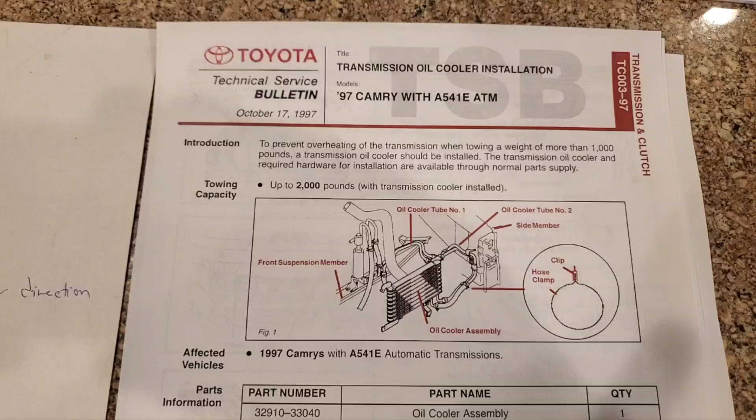In today's video, I'm going to be doing what I guess I would consider the first real mechanical addition to the car. Again, this car is the 99 Lexus ES300. If you've seen any other videos on my channel, you've seen I've posted a variety of videos on that. And what we're going to be doing is installing a transmission cooler.

And you see in front of me here, we have this. It's for this 97 Camry with the A541E. And you might be thinking, well, you have a 99 ES300 with a different transmission. If you know, it has the U140E.

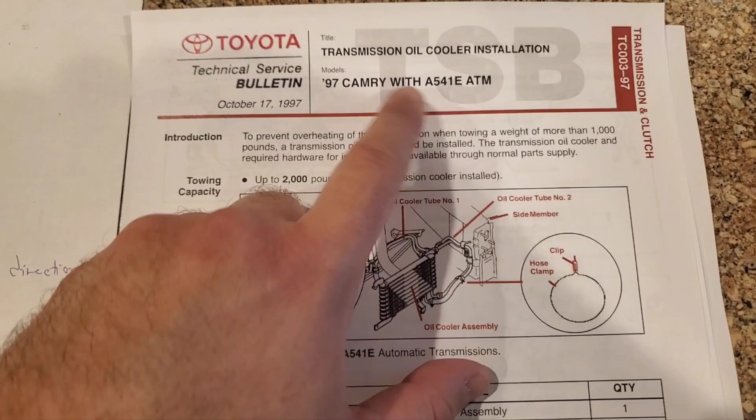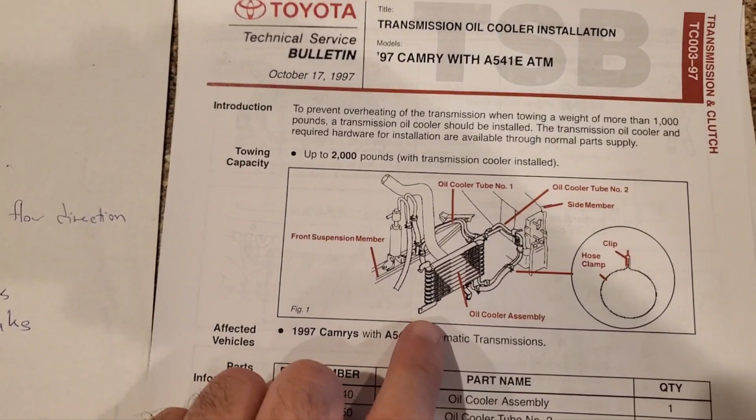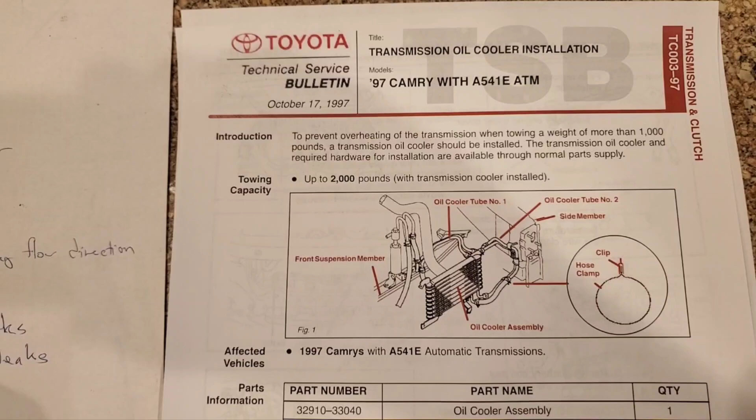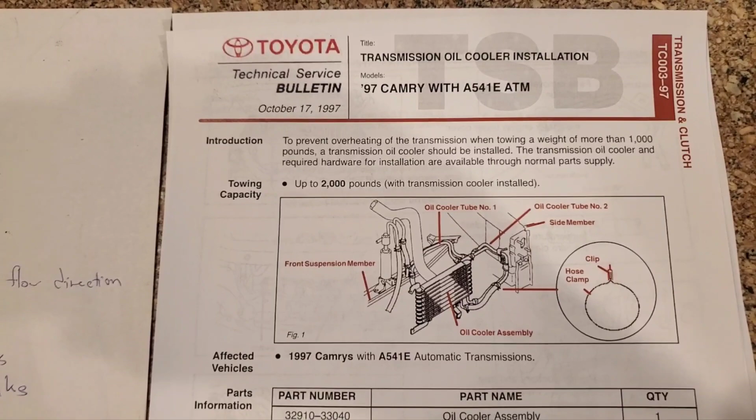But I had the transmission rebuilt at the beginning of this year because it went out in the middle of a road trip. And it's the second time this transmission's been rebuilt. The other time was maybe 10 years ago or so. So it's a different transmission, but if you know about it, you know it's the more troublesome transmission. And when I got it rebuilt, I was told that one of the culprits that destroyed it was heat, excessive heat.

So fortunately, Toyota actually designed a cooler to go, maybe not with this specific transmission, but when you actually go look up parts for the Lexus ES300, you're going to see there's actually a transmission cooler that uses a lot of these same parts. Let me show you that.

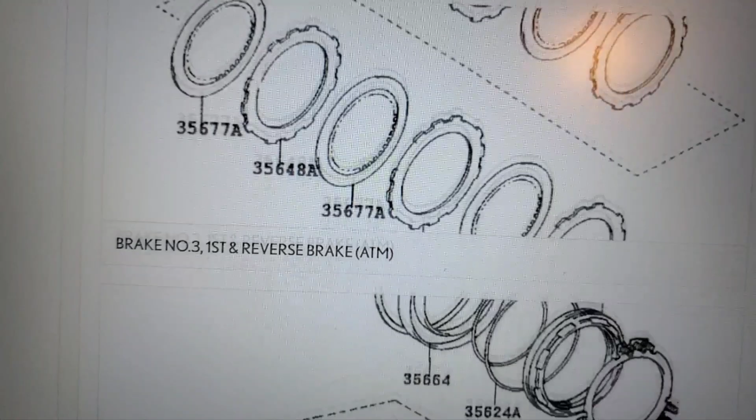So here on parts.lexus.com, we're going to go down and there should be my 99 ES300. And then we're going to go down again to the transmission and driveline. And then we're going to go down again and we see there's the brake band, oil cooler.

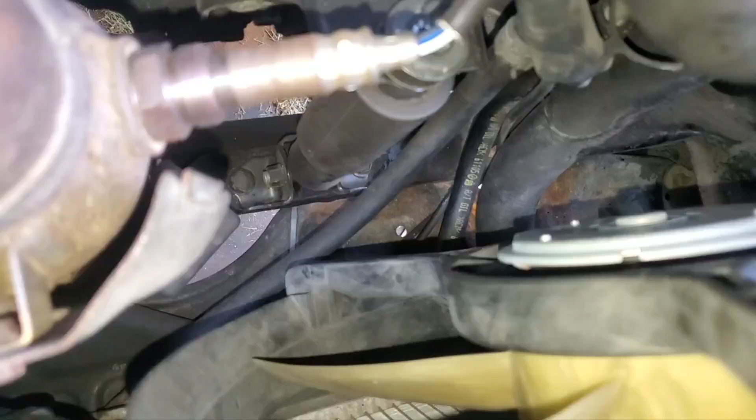So I'd seen this just surfing around parts, and I see that they have this cooler, but when you look in the actual vehicle, you don't see any cooler attached. You see right here those same style hoses, one going out, one coming in, and then it just goes into the radiator. One goes over there and feeds into the radiator down there, and then the other one feeds into the radiator right here.

So that's what was seen. So I'm like, where is this cooler? Why doesn't my car have this cooler?

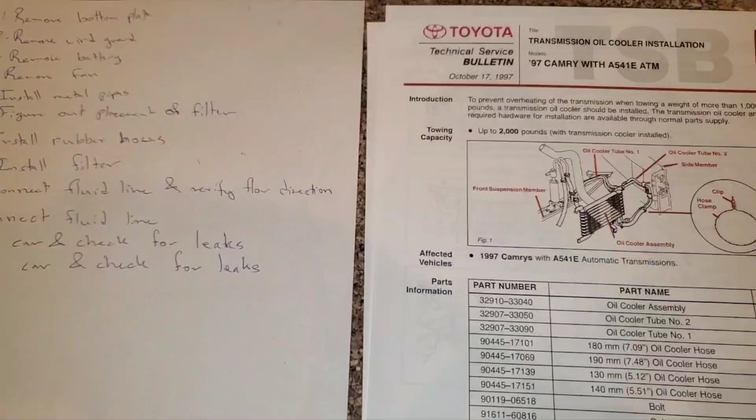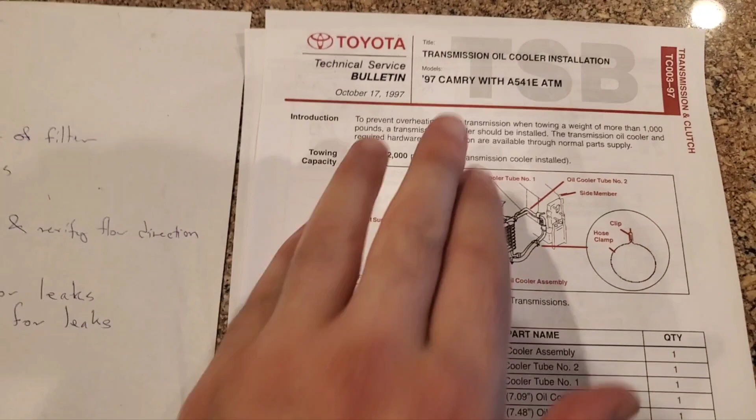And I've actually looked for months for this, and I actually have the full service manual for the 2001 version of the car, which uses the same transmission. I didn't see anything. I believe the 97, 98 ES300 does use this trans, and they switched it over in the 99 year.

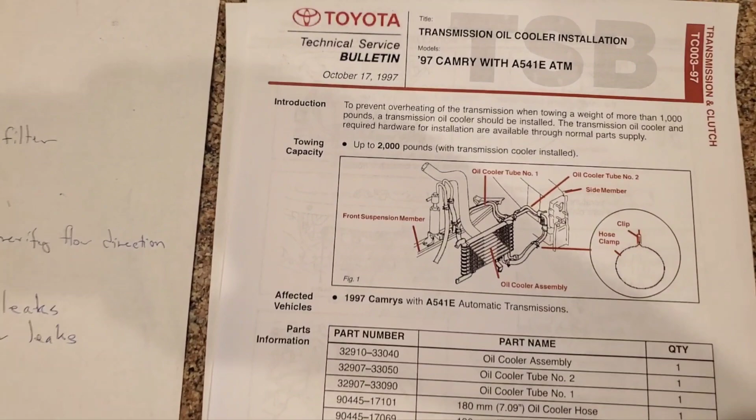Unfortunately, because I've heard very good things about the A541 and a lot of negative things, and have had to personally experience and pay for the negative things along with the U140E, that being by far the most expensive repair I've had to do on this car.

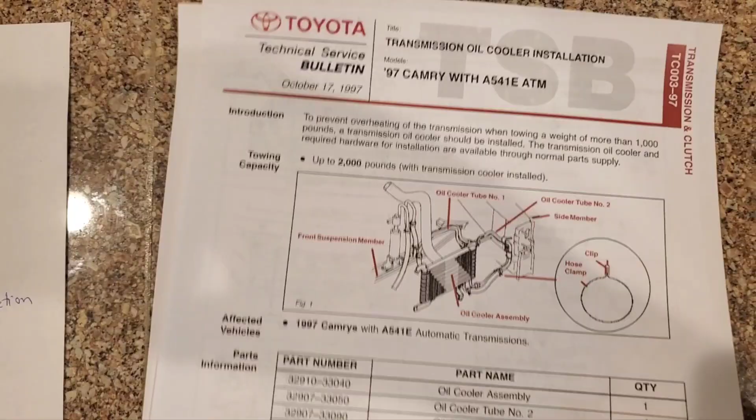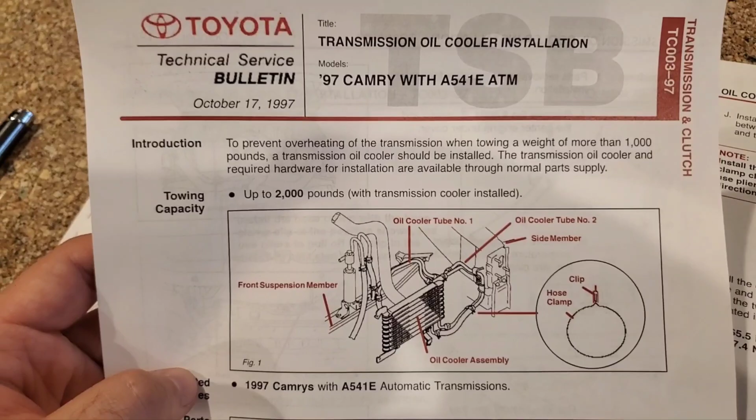So at the bottom of, I believe, online you can find the 99 Camry full service manual, and it's like 4,000 pages, and all the way at the bottom they have this thing about the oil cooler. This was the first time that I'd seen it other than that parts catalog, and it gives you the instructions on how to install it.

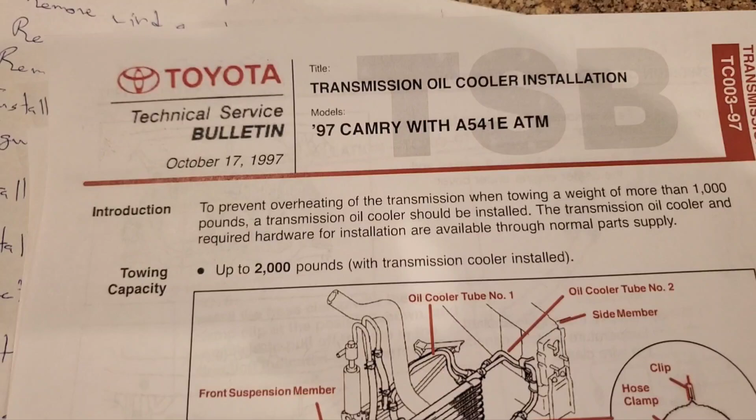Now obviously they're saying what you need is if you want to tow and you have this transmission, but really I'm just trying to hopefully extend the life of this transmission, and hopefully, until I either get another car or whatever the case may be, not have a problem with this transmission ever again.

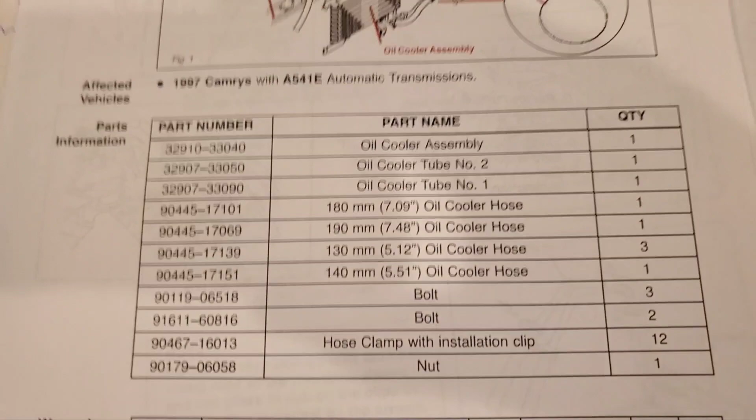So this was actually the most helpful thing that I found. It gives you all the part numbers, the oil cooler assembly, it has these tubes, and namely what makes it great that they designed it is that they actually designed these parts that are metal tubes that give you a little more confidence instead of just running rubber tubes.

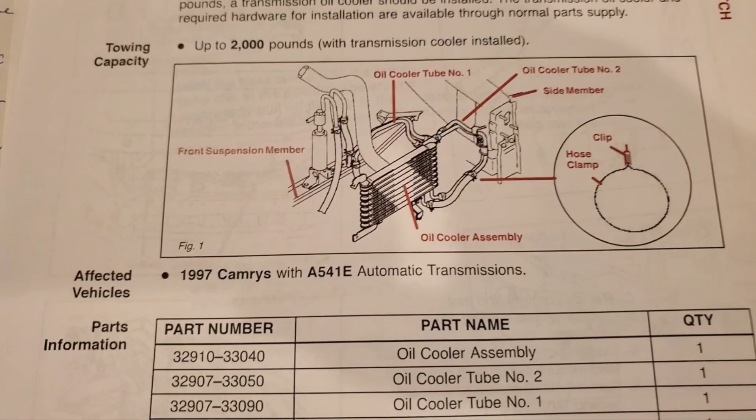Obviously I could have just run a rubber tube and then zip tied it and done it, which would have been a lot cheaper, but the last thing I want is for this thing to leak out all the fluid and then I lose the transmission anyway.

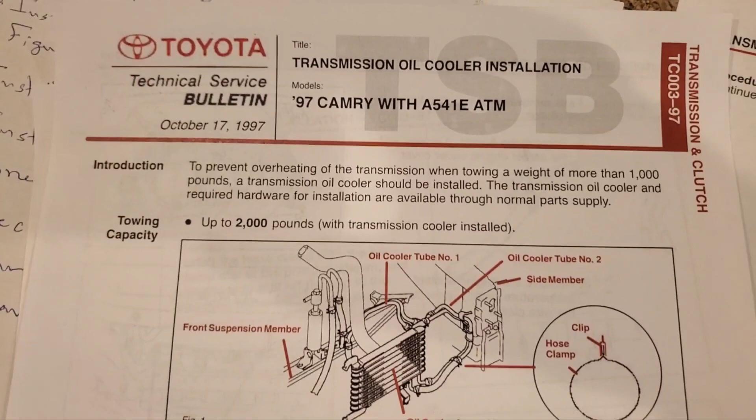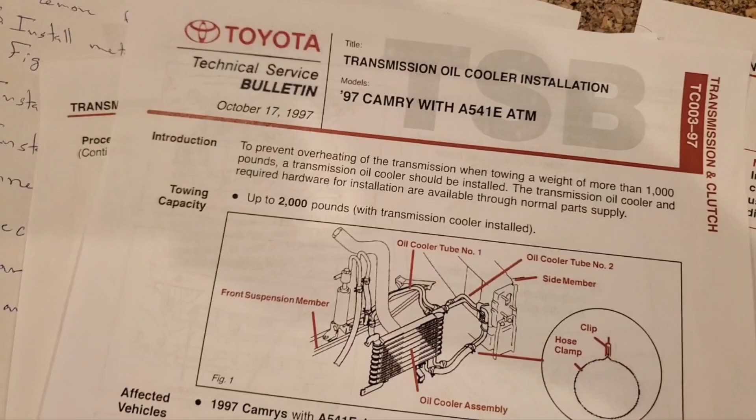So I've been wanting to do this repair, but also wary about it because I know this transmission has these issues. The transmission repair shop said that heat was likely one of the causes.

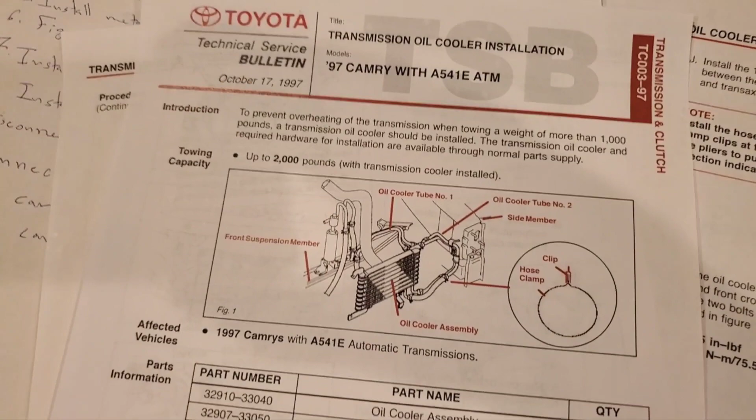There's probably other causes, but that's one of the causes why it failed, especially in the middle of a road trip on more hilly terrain than I'm normally driving. God only knows. So I'm going to install this cooler, and in addition, I'm also going to install an additional inline filter, one of those Magnefine filters.

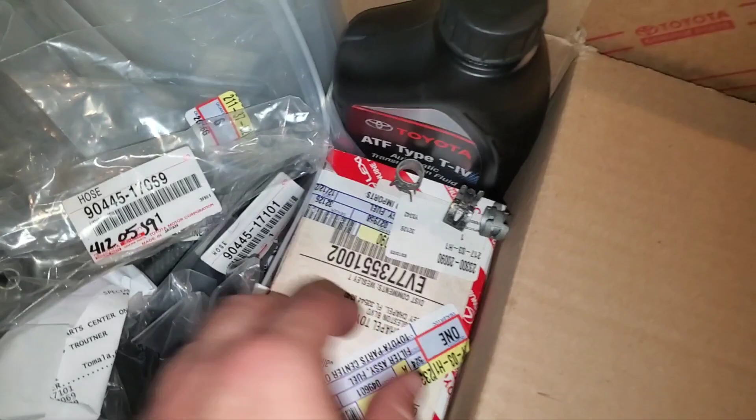I was able to get the parts, and since then some of them have actually been discontinued. Here's the Magnefine filter. I got this stretch of line from Hayden, about 4.5 feet of transmission line. From Amazon I got some transmission fluid. I have a fuel filter in there too, but that's separate. I have some clips I got from a junkyard, and I got transmission hose directly from Toyota that they recommended.

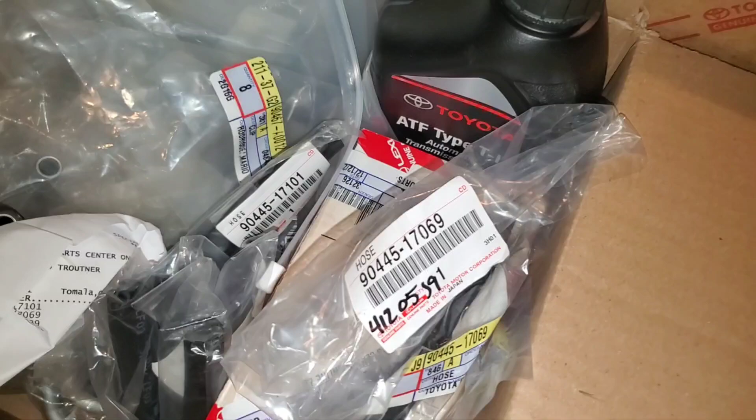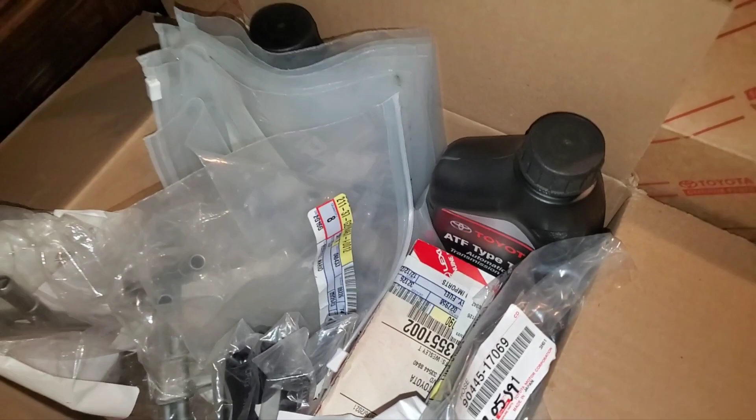Obviously I probably was overdoing it, but for a lot of it I'm going to use the transmission hose from Toyota. And where I splice in the filter, I'm going to use this other transmission hose. That's my plan.

But the big thing are these metal lines. When I checked again shortly after getting them, it looks like they discontinued one of these, I believe this one, or maybe the other one. When I first ordered them, the dealership said this is going to be on a severe back order.

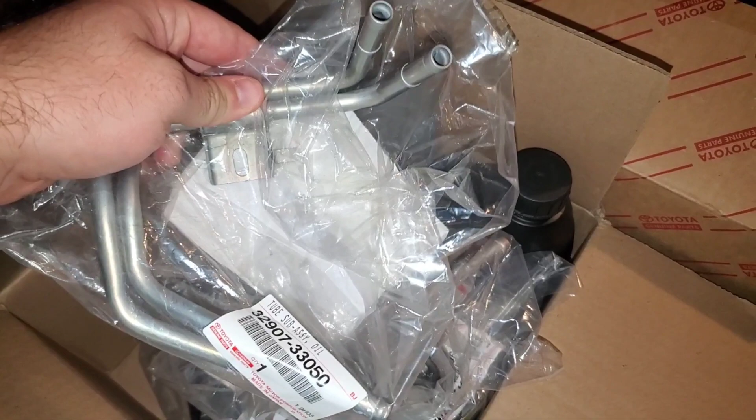We don't know when you're going to get it, do you want to cancel? I said no, we'll leave it — if it's a couple weeks and I don't get it, then screw it. But a couple days later they said, hey, we got the hoses. So that's great — very well made Toyota hoses.

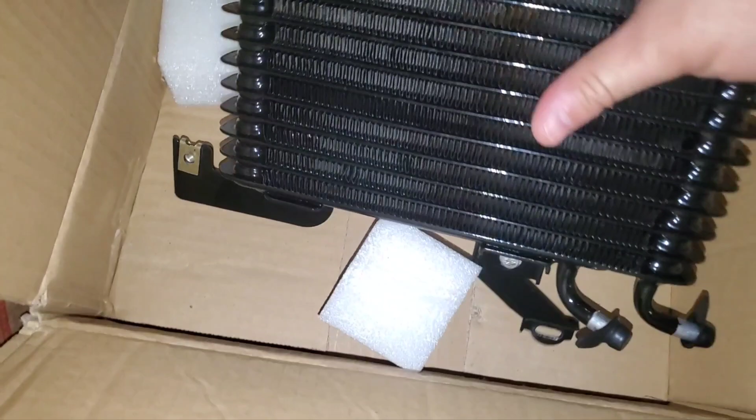I actually ended up getting two coolers. The reason is this was the first one I got, a Dorman, made in China cooler. I didn't get the Toyota one because that's actually like $500 from Toyota, but I can find an aftermarket cooler for like 50 bucks. Hopefully I'm not making a mistake with that, but I don't have $500 for an extra cooler — I might as well save it and use it on a new car with a new transmission.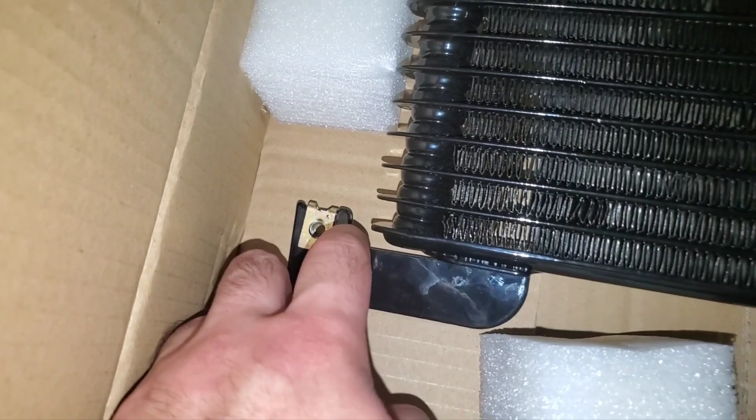So we're not going to use this cooler, because the problem is this little lip — sorry, I have these papers in the way — this little lip here that comes up. If this wasn't here, this would have fit perfectly. But the one I ended up getting looks like this, and here there's no lip. That lip on the other one actually pushes into the bottom of the crossbar and makes it very wonky to fit.

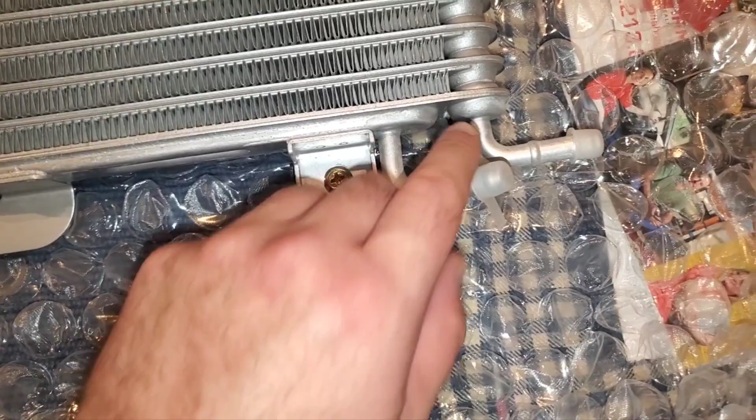I haven't test fitted this one yet, but based on my test fitting the other one, I'm pretty sure this should work fine. I kept the other one because I may use its little bracket, depending on which fits better. I also like that this has what I believe is called a double barb hose connection, whereas the other one just has a single barb. I may have that language wrong, but essentially there are two little bumps.

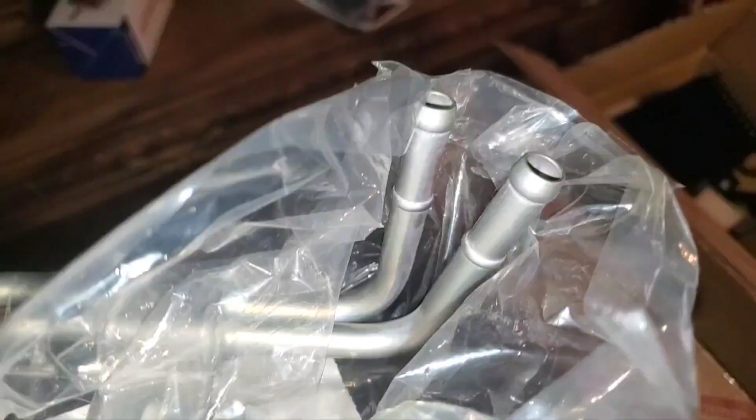There's one at the end, in the style of the hoses — we see the Toyota hoses use that same kind of design, with one bump on the end, then a space, then another bump, and the clip goes in that middle area. Whereas on this cooler, it doesn't — it just has the one bump at the end. So I'm a little more confident with this one.

Obviously my biggest concern is it leaking, so I think this will help. I'm just going to leave that on. So this is the cooler I'm going to use — I got it off eBay for about 50 bucks, and both of them were about 50 bucks, so I spent $100 on two coolers. Maybe I'll be able to return the other one, I'm not sure.

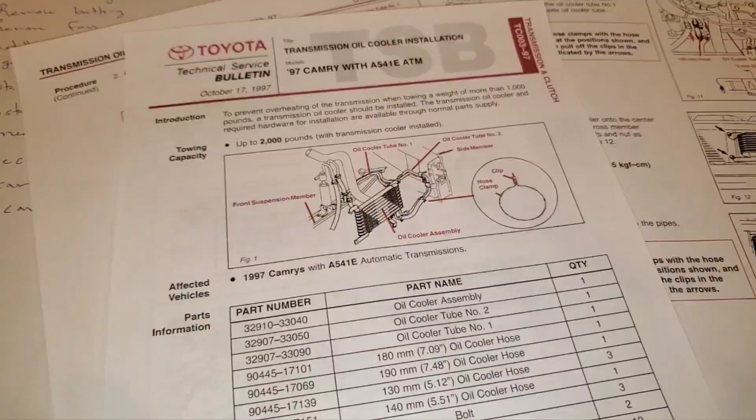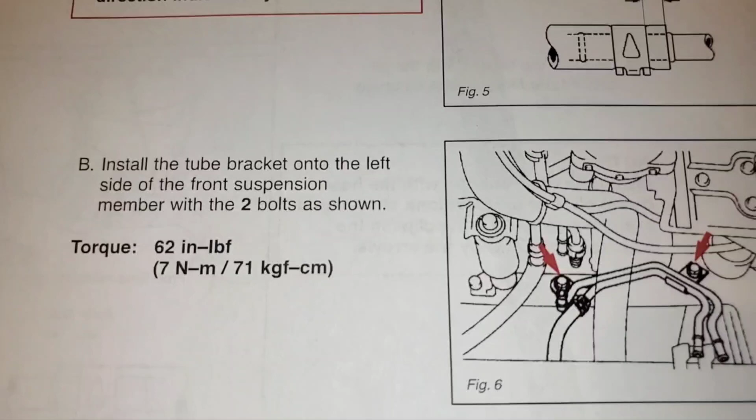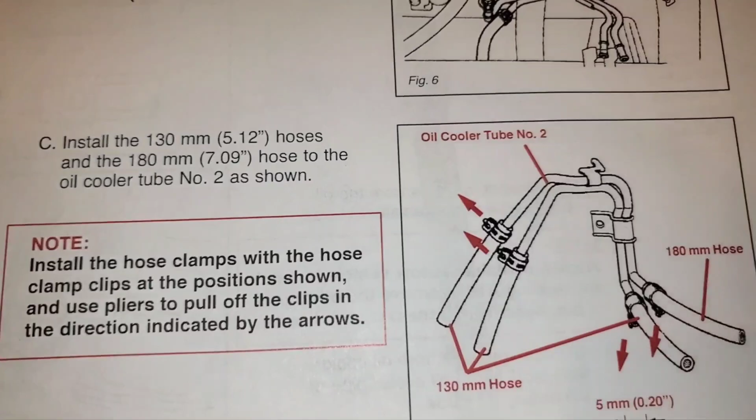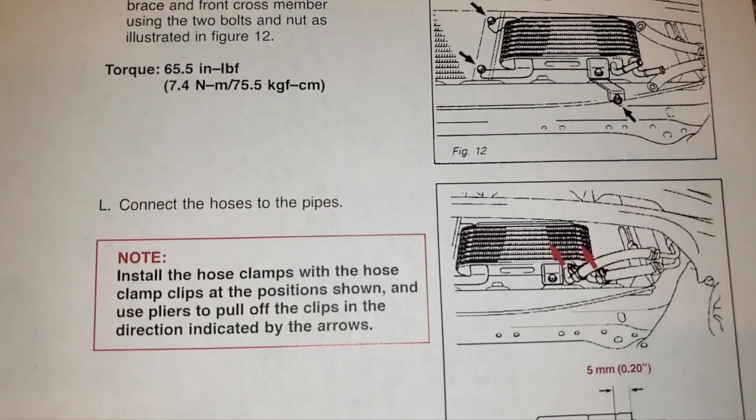The actual procedure should be pretty simple, but the risk is high as far as making sure there's no leaks. We're gonna take off this bottom plate, remove the temperature switch connector, remove the fan, install the cooler line, install the bracket, install the oil cooler tube, install the oil cooler, install the cooler on there, and then reconnect the temperature switch. So it's pretty much self-explanatory.

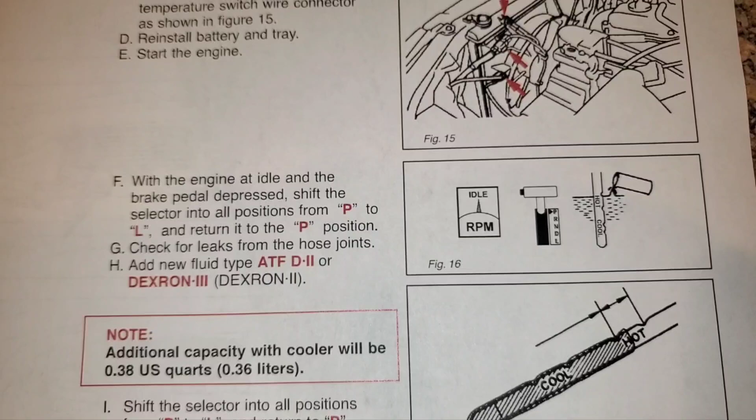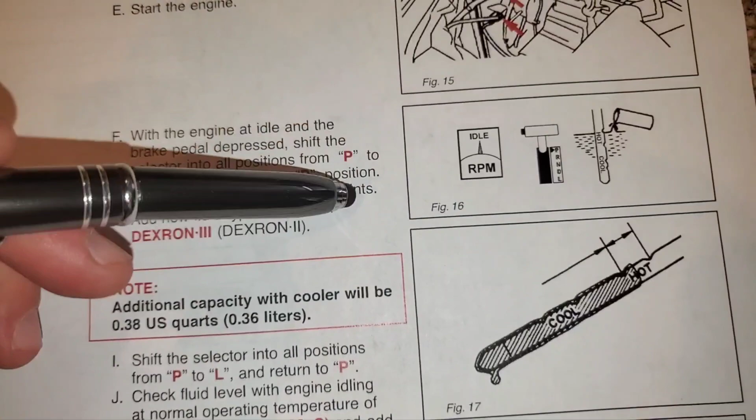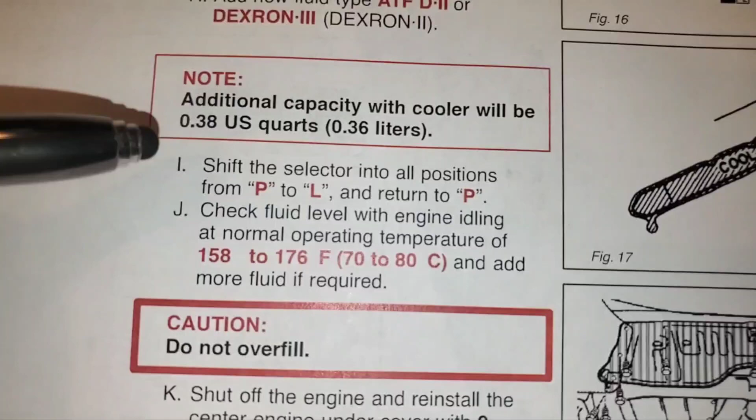Then we're going to make sure that we have the correct fluid level, which right now my fluid level is a bit high, and it's been that way since I got it rebuilt. So I'm not really going to try to mess with the fluid level, as long as it's within the line. If it's a little above the line, I know you're not supposed to overfill it - caution, do not overfill. That's how the shop did it. I don't know, but really I want to make sure my temperature runs in the right range, and that's about it.

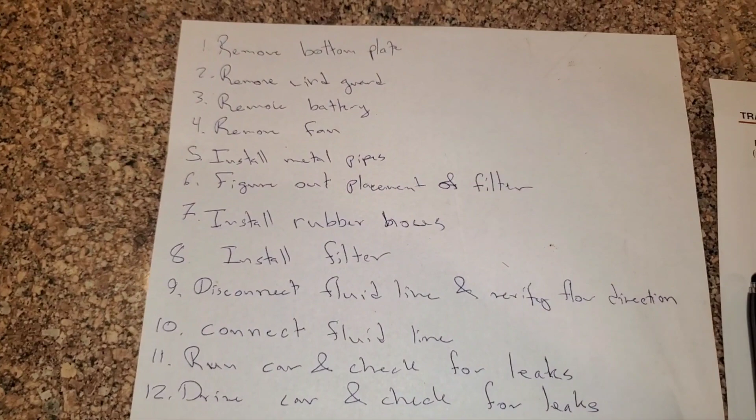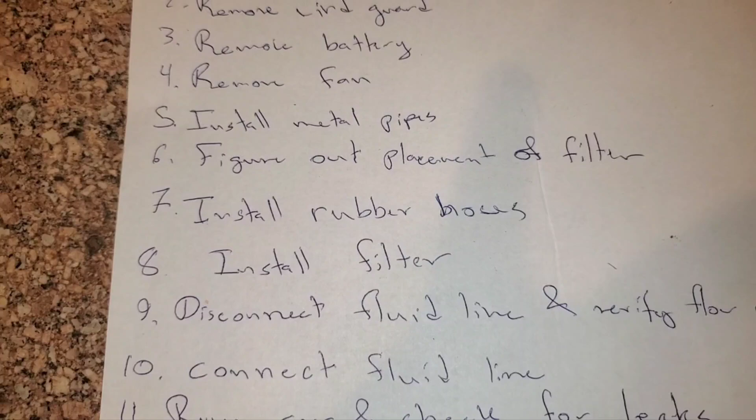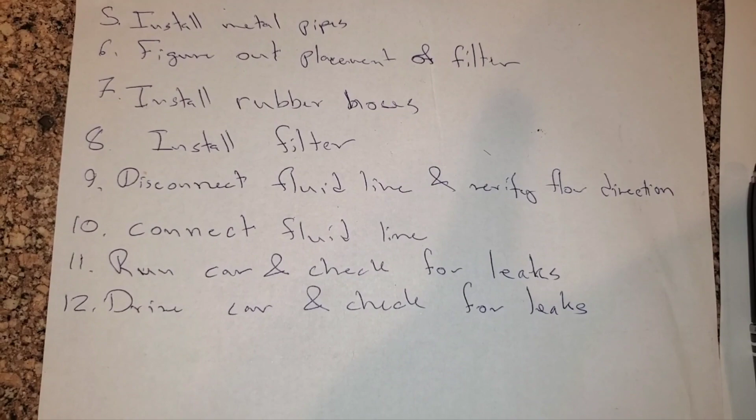I've extracted my own little instructions, so I have two sets of instructions. The bottom plate, there's this wind guard thing, there's the battery, the fan. We're going to install the metal pipes, figure out where we're going to put the filter, put the hoses, install the filter, disconnect the fluid line and verify the flow of the fluid, then connect the fluid line. Then we're going to run the car and check for leaks, and then drive the car and check for leaks. Obviously there's going to be different pressures when the car is actually driving as opposed to when it's just sitting idle. So hopefully it goes well.

So here we have the first part installed. The battery was removed, this cooling fan was removed, and also that plate at the bottom - those are pretty self-explanatory.

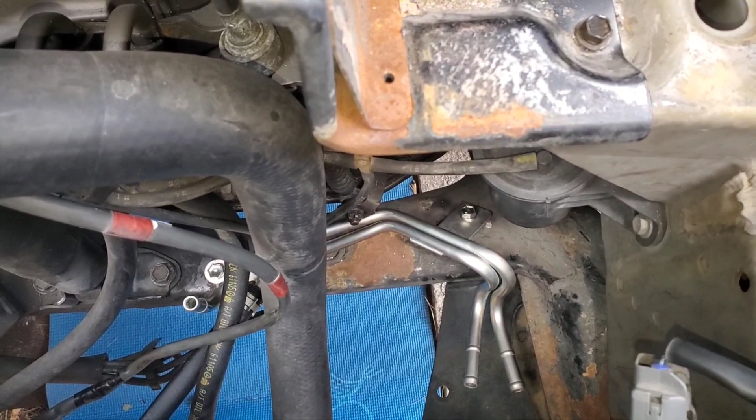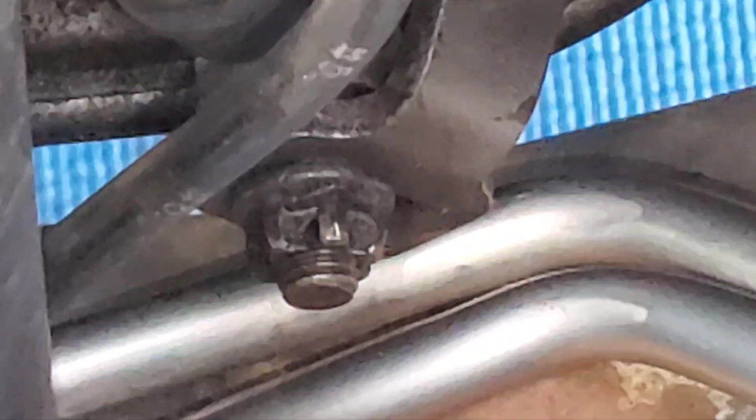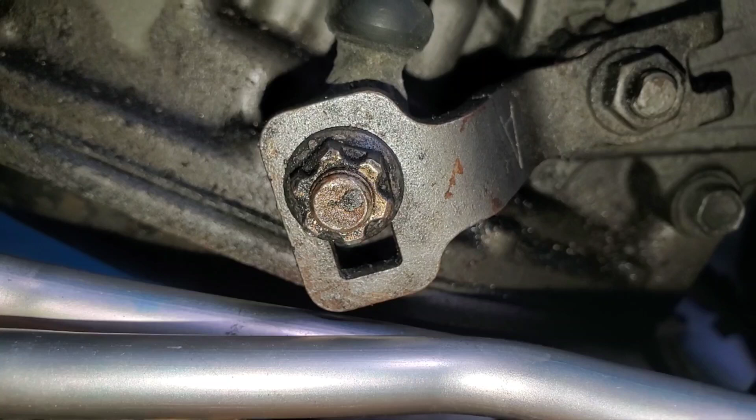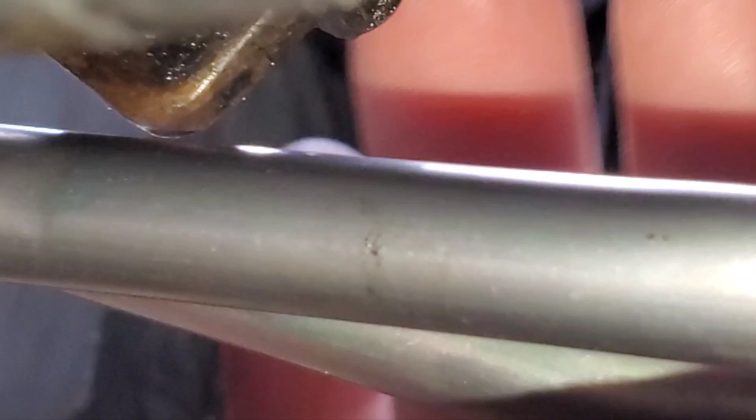The first thing I want to point out is the thin margin between where the gear selector is and this hose. I kind of want to bring the camera down into there and show you. It's almost touching, but it's not. Here's the back side of this, and you can see the gap - it almost looks like it is touching, but there is a gap. I hope that's when it's in park. I tested it, and fortunately it goes up when it's put in gear, but that is tight - I could fit like a piece of paper under there, and like a leaf. So I hope that doesn't rub. I guess it's a good thing that it's metal, but boy, that is tight.

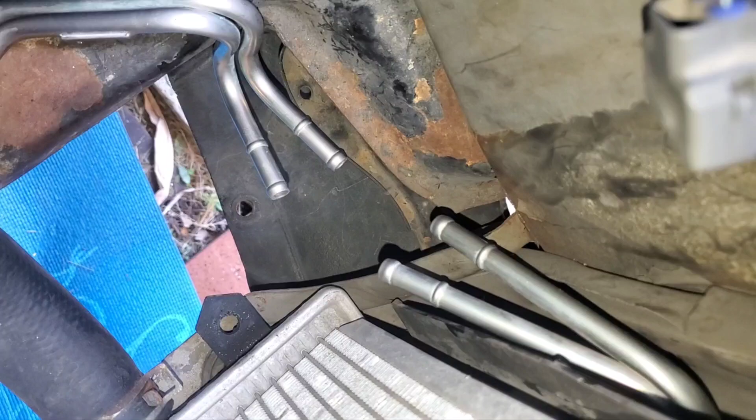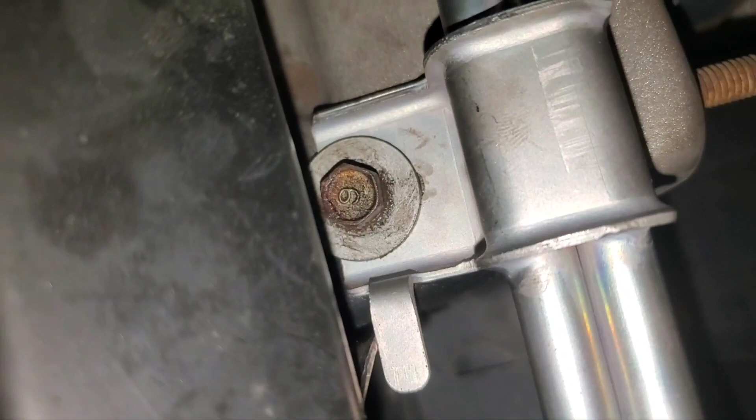So here we have the other set of hoses, and we see that they're lining up there. I gotta just make sure - I'm pretty sure the left one goes to the left one, the right one goes to the right one. And here we can see more of that installation. So it goes in, let's see if we can see - there's the bolt holding it in, and these are nice and sturdy. So we got the two metal hoses in, there's two 12mm bolts holding that.

I think I'm just leaving this as it is. I messed with it a little bit - I kind of don't want to mess up how that engages, so we'll just stick with that since it's only when it's in park.

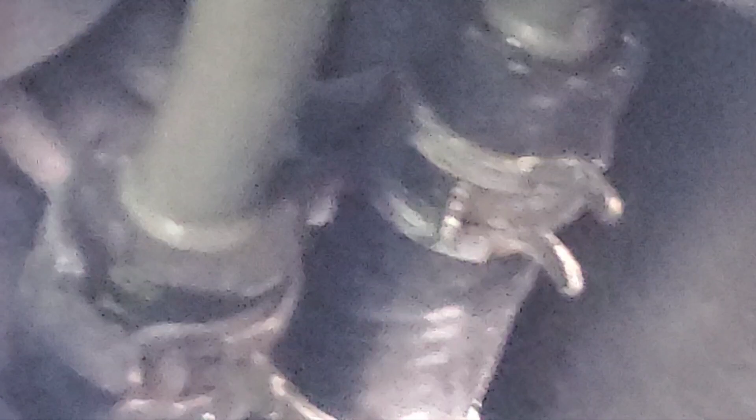This is actually a couple days later, and I have a couple things I want to note about this installation. One of the things is, let me see where I placed that clip - I guess it's in a good place.

Now I've gone back and looked at a couple videos, I'll leave the links in the description, of somebody who did a fluid flush for, I guess, a 97, 98 version of this car, and then someone who did it on the 99 to 01 version of this car.

So the 97, 98 uses the A541E, which is what the instructions were based off of for this transmission cooler, and it is assumed that this line on the right where I have the filter was the return line, and this was the outlet line. So it was assumed fluid was coming out of this line and coming back in through here, going into the radiator, coming out, coming back through here.

This was my assumption, and it was actually one of the things I was worried about, which direction the fluid's going to flow. And someone actually mentioned, check and see, just take the fluids off, put a bucket underneath, and run the car for like 2 seconds just to see which side the fluid comes out of.

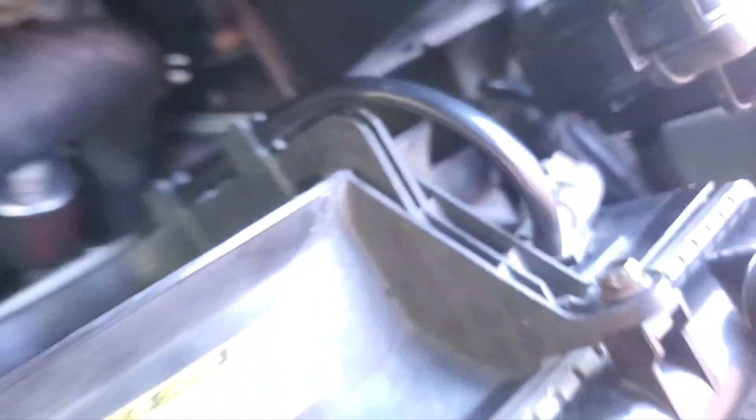I don't know if you can see them, but then the other pipes are over there. Can we see them? It's difficult, but we can see them down here. So here's how I plumbed everything.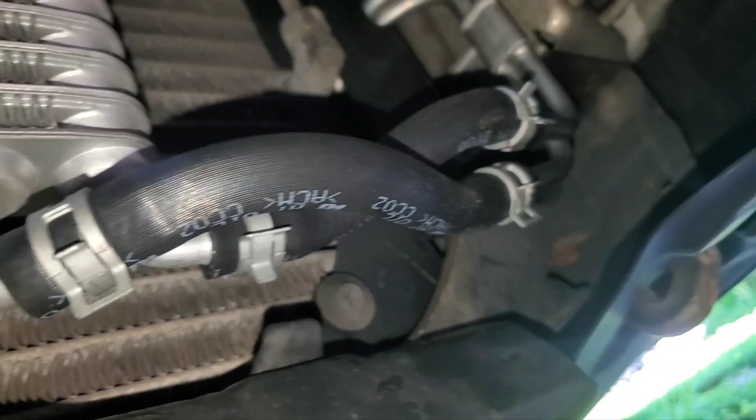So there's the other pipes, and then there's the hoses running into the cooler. And if you look back at the diagram, you'll see that these hoses are actually switched. The one on the bottom was designed to go to the inlet there on the bottom, and then vice versa. So what happened is I set everything up, and in a bit of comedic irony, I thought, well, the fluid direction must go this way.

So I had the opportunity to set up the hose for both ends coming out, and to make sure that no matter which side it came in, it would land in the bucket.

But I was very confident that the fluid was going to run the way that everything else said, because if you go look for this radiator in the full service manual, it calls that little pipe right there the inlet pipe. So that will lead you to believe that that's where fluid is coming in, and fluid is coming out the other side.

But this is what happened when I turned on the car, and I had the whole setup under the understanding that fluid was going to come out in that direction.

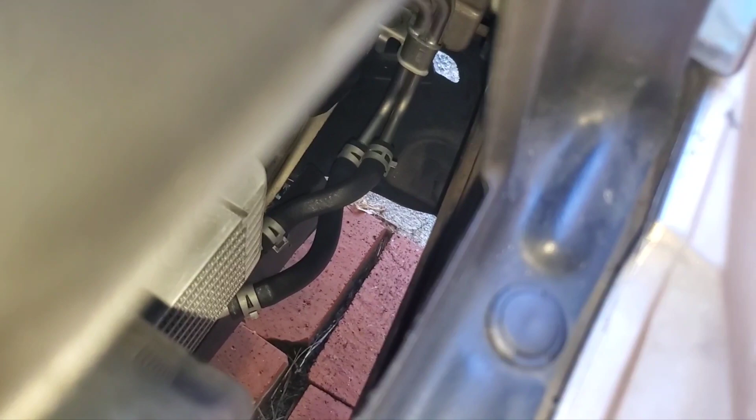And unfortunately, I had the filter installed the incorrect way, because it was running through this, going through everything, and then I just didn't have those little pipes connected. I had one coming out the bottom, this one I had going into the bucket, and I had that side open.

So I was going to assume fluid was going to come in through there, go into the cooler right here, bridging that connection, and then come right out of there into the bucket. But that's not what happened. So for whatever reason...

The A541E flows in one direction, and the U140E flows in the other direction. So once I realized that and confirmed it, I did a couple of tests to confirm it.

So that first one was when I realized something was horribly wrong, and then this test is when I just went back to basics and just put this hose on the left side, and just ran a straight hose on the right into the bucket.

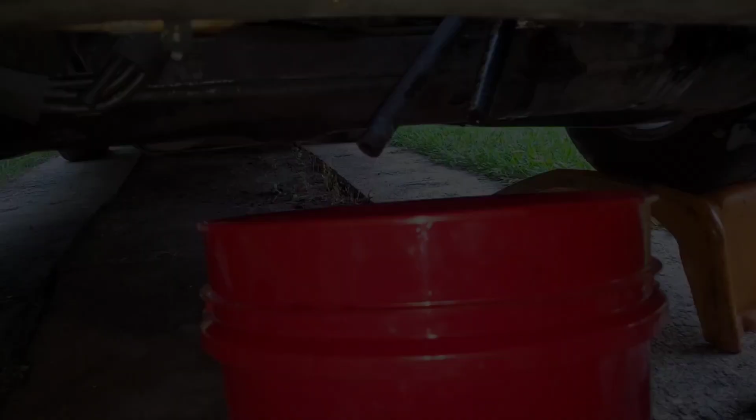Yep. That is definitely okay.

You can see clearly that it comes out of the right side. So since it comes out the right side, I now have the filter with the correct flow direction. I have it all plumbed up, and since it's flipped direction, that's why I flipped the direction that goes into the cooler. I don't know if that's a big deal, but it seems like it's designed for it to come into there and come out of there, so I ran it.

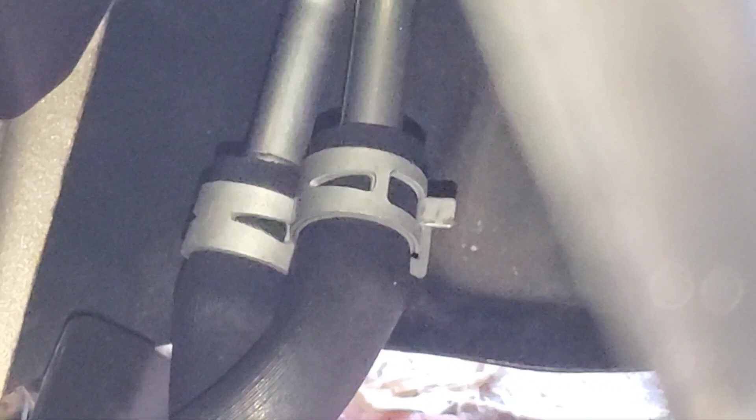This is the hose where, during the test, the fluid was spilling out onto the floor, so that's going into the cooler, then coming out of the cooler. It comes back out of the cooler and runs over here into the radiator, and then it comes out and comes back into the transmission.

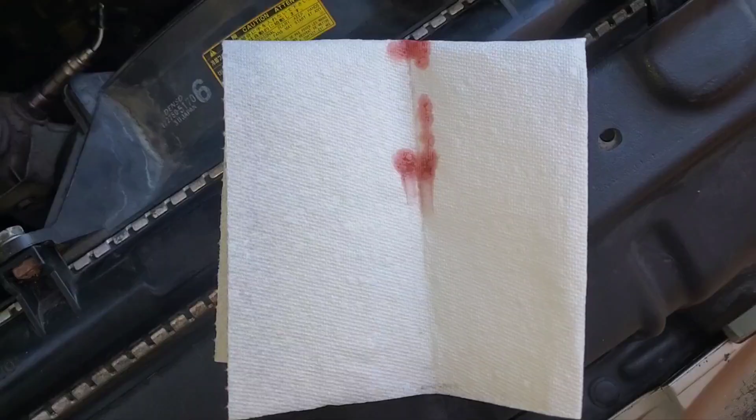So now let's check the fluid level and see where things are at. I just wiped down the dipstick. Let's see where the fluid level is. Obviously this is it with the car off. The correct way to check it is when it's on and idling and it's been through all of the gears. So it looks very overfilled right now.

As kind of a wrap up of this part 1 video, I wanted to talk about the results. This is going to be more long term to see how it turns out, because if I installed the cooler and the transmission blew out the next day, was it worth it? We'll see. So with limited time, do I wait years to release this video, or release it as a part 1?

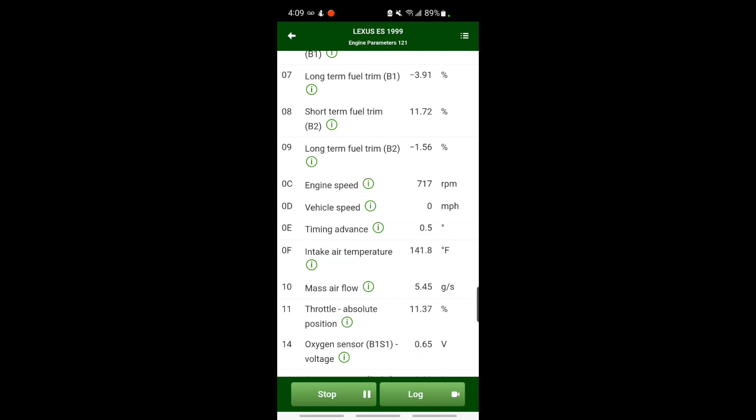For part 1 of this video, I want to take your attention to this app called Mototak OBD. You can purchase an upgrade, so if you have a Toyota vehicle, you can purchase this upgrade where you can see the transmission fluid temperature and things like the fuel tank vapor pressure sensor. It's 99 cents for the week to try it out, and this isn't sponsored or anything - if they reach out and sponsor it, I'll do another one. But you get all these cool variables.

I had purchased in the past an app called Dash Command, and it showed a lot of these, but especially the transmission fluid temperature and fuel tank vapor pressure were interesting. Oh look, 32 degrees - I don't think my transmission fluid is freezing. What's going on? There we go, it was just reloading. So 170, I think it's loading, hopefully. There we go, it's loading. So it's running at like 170 degrees right now.

As a wrap up, I did probably a good 30 minutes of city driving, and then the car was sitting for like 15-20 minutes, and then I just got back in the car and turned it on. So when it was sitting, it read 172.

Now I will say, from the full service manual - maybe I'll show it in a future part, subscribe to watch that - it says for doing tests, if you're going to check the fluid level or test different things on the transmission, make sure you get it up to normal operating temperature. It lists two different numbers: one is 158 to 176 degrees Fahrenheit, the other is 122 to 176 degrees Fahrenheit. So right now we're about 8 degrees below what it considers the top end of its operating range.

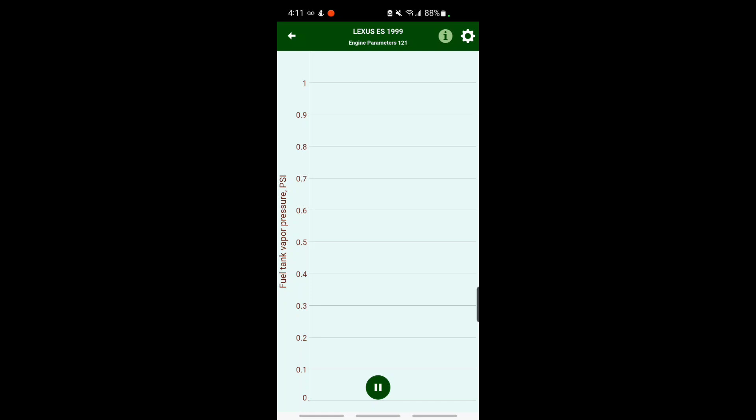Then we see the fuel tank vapor pressure is, I guess, going up, and seeing that really helped with fixing the vapor canister.

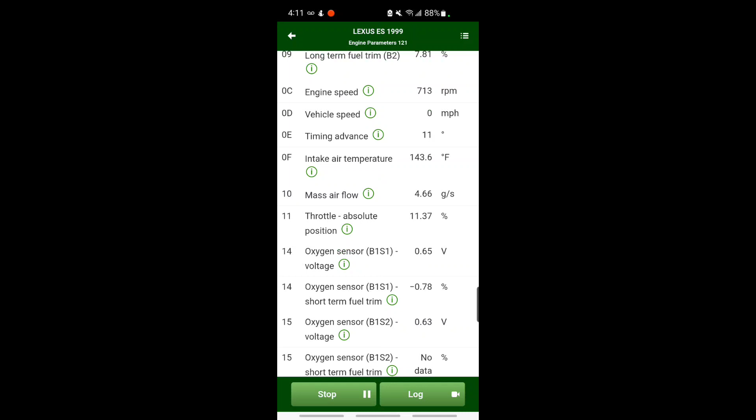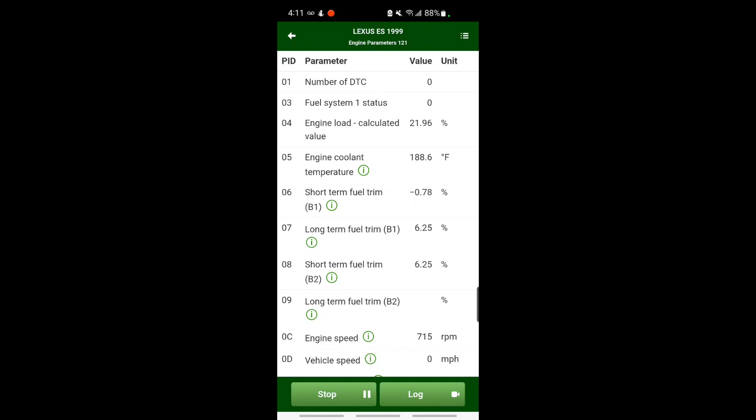Yeah, this app has worked pretty cool. At some point I may just get it outright for $15, this Toyota plug-in, and considering how much cheaper that is than a full scan tool - obviously you can't do everything that a full scan tool can - but it's at like 1% of the cost. So the app is free, and then you get the plug-in and it gives you the rest of the variables.